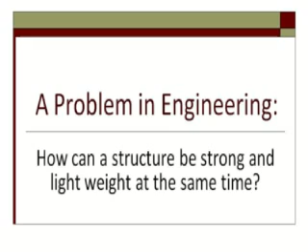The title of this presentation is A Strong and Light Structure from the Quran. Now, the title of this presentation stems from a problem in engineering. This problem is that engineers, when they want to have a strong and stiff structure, they always end up with a heavy structure. Let me give an example.

Suppose an engineer wants to increase the strength of the framework of a car. He ends up with a heavier car because he uses heavier materials in the construction, because a heavy material is a stronger material. And this is a problem. Why? Because when you have a heavier car, it consumes more fuel, and there is a phenomenon called self-loading, which means that the car itself puts so much stress on itself due to its own weight. And so it's a problem.

So engineers dream of a structure that is strong and stiff and at the same time light. And in engineering sciences, there is no solution for this problem till this day. But I'm presenting here a solution for this problem from the guidance of the Quran, from the guidance of the last revelation of Allah God to people.

And the key to find the answer to this problem, we can find it by pondering upon verse number 7 of chapter 32 of the Quran, which reads, "Who perfected everything He has created, and He began the creation of people from mud." So here Allah God Almighty is telling us that He perfected everything He has created. And in engineering terms, this means that every system in creation is an optimal system, is optimized, meaning the best utilization of energy and matter.

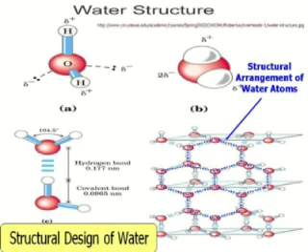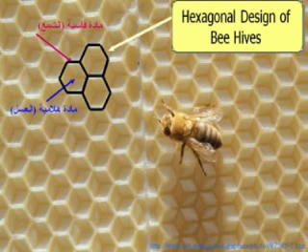So if we start by pondering upon the structure of ice water, we see that it has a hexagonal internal design. What you can see on the screen is the basic structural unit of water. We have 6 sides supported by 6 links. And this basic unit, we can find it also in the design of beehives. The way Allah Almighty created beehives, we see again a hexagonal cell supported by 6 external links. And also in wood material the same, we have hexagonal cells supported by 6 external links.

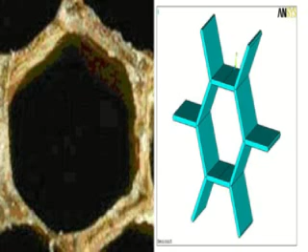So what we end up with is that the basic structural unit in creation is the one you can see on the screen, 6 plates or 6 structural units supported by 6 external links. Now, again, beehives, human bone, wood, they're all light structures but at the same time very strong and very stiff. So the answer to how these structures can be strong and stiff and at the same time very light is found in the study of this basic hexagonal structural unit of creation.

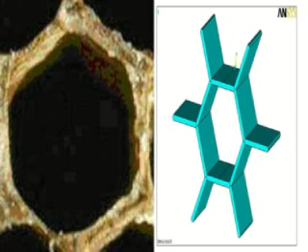So if we start studying this basic structural unit of creation, for comparison purposes, I want to compare its performance with a typical structural unit currently utilized, which is the square and rectangular sections. For example, the room you are sitting in maybe has a square or rectangular design. So I want to compare the performance of the hexagonal basic structural unit of creation with the typical structural units used in construction nowadays.

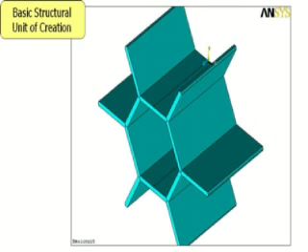Now, firstly, the hexagonal basic unit of creation, since it has a hexagonal shape, can cover maximum volume with minimum amount of material. Suppose you have certain structural plates and you want to cover the maximum volume or the maximum area with the minimum amount of plates.

The hexagonal shape is the best one to do that. So since you are covering maximum area with minimum amount of material, you will have a lightweight structure. That's the first advantage of using hexagonal arrangement rather than square or rectangular arrangements.

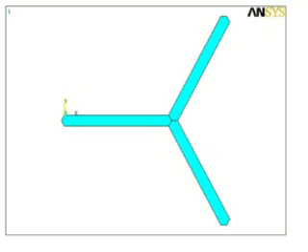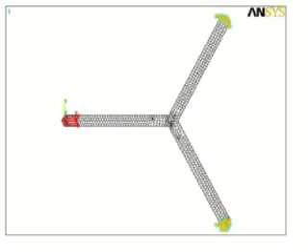Secondly, if you look at the links between the plates, here is the link between three plates in the hexagonal design. Now this link, if we test its performance by applying a compressive force from the left, as you can see with the red arrows, and fixing the ends on the right, this compressive force will yield a maximum displacement in the link of about 34 micrometers.

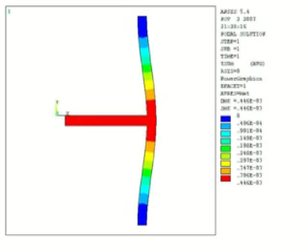And if you apply the same compressive force to the typical sections used nowadays in construction, it will yield a maximum displacement of 464 micrometers. So in the hexagonal design, the displacement was about 34 micrometers. Here we have 464 micrometers.

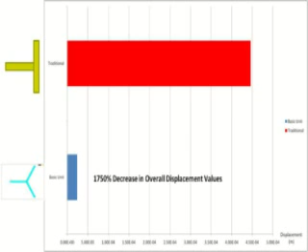And if we put the two values on a bar chart, we see a huge difference between the displacement value in the traditional sections, indicated by the red rectangle, and the displacement values in the hexagonal arrangement, indicated by the blue rectangle. So you see that the hexagonal design has far smaller displacements than the typical square sections, which means that the hexagonal design is stiffer than the square arrangement. And that's what we are looking for, a very stiff and strong design.

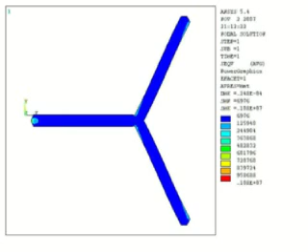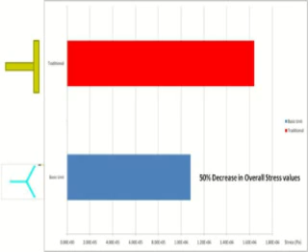Also, if we look at the stresses produced in the section, in the hexagonal arrangement the maximum stress is around 1 megapascal, 1 million units of stress, and in the typical section it is about 1.6 megapascals. Comparing the two values, we see a 50% decrease in overall stress values in the hexagonal design compared to the traditional sections. So the stress produced in the hexagonal shape is smaller than the traditional one, which means that you can apply more load to the hexagonal design before it reaches fracture point.

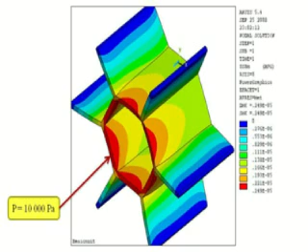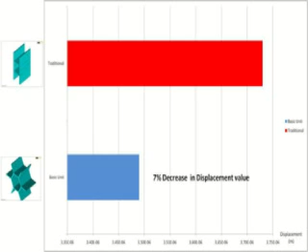Now take this comparison to the whole structure, to the whole basic unit. As you can see on the screen, we have the basic structure unit of creation, and I applied a pressure of 10,000 pascals to its front surface, and the maximum displacement was about 3.5 micrometers. I applied the same pressure to the square, traditional sections, and the displacement was about 3.7 micrometers. Again, smaller displacements are seen in the hexagonal design. So the hexagonal design is a stiffer design compared to the traditional sections.

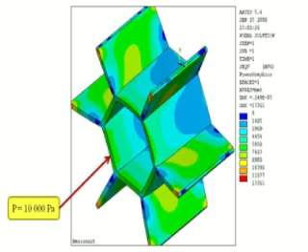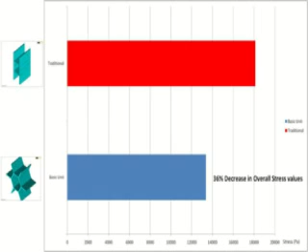And looking at the stress values, under a pressure of 10,000 pascals, the hexagonal design yielded a maximum stress of about 13,361 pascals, and in traditional sections we have 18,133 pascals. So there is a 36% decrease in overall stress values in the hexagonal design. This means that the arrangement of structural units in a hexagonal design yields a stiffer and stronger structure compared to the traditional design using squares or rectangles.

So linking everything I've said so far: the hexagonal design can cover maximum volume, maximum area with minimum amount of material, and it's stronger and stiffer than any other design. This means that the engineering problem is now solved. We can get a strong and stiff design by arranging the structural units in a hexagonal design, a strong and stiff structure that is yet light in weight.

Let me give a practical example of this. The room you are sitting in, instead of having the walls in a square or rectangular pattern, put them in a hexagonal cell. In this case, you can use less structural material and end up with a stronger and stiffer design, which is the aim. This is the optimal system: strength and stiffness with light weight. So you see, brothers and sisters, how from the Quran, the last revelation of Allah given to people, we get the answer to a question that eluded engineers till this day.